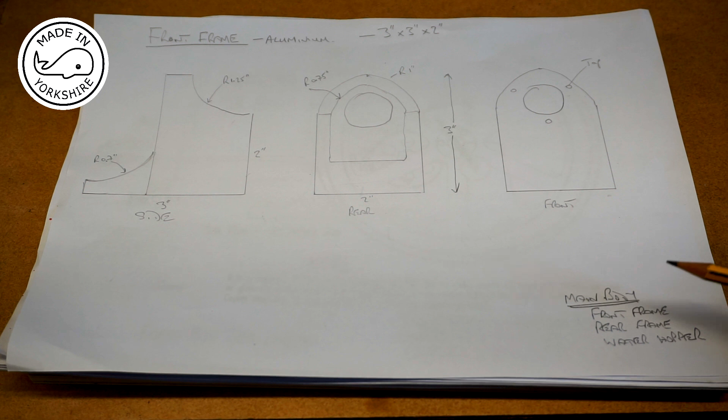Now in this video, I'm going to have a go at making the front frame for the hit and miss engine, the Farm Boy. And by the looks of the plan, it is quite complex, so let's see how we get on. Okay, so the main body of the Farm Boy is made up of three pieces, or three sections. There's the front frame, the rear frame and the water hopper.

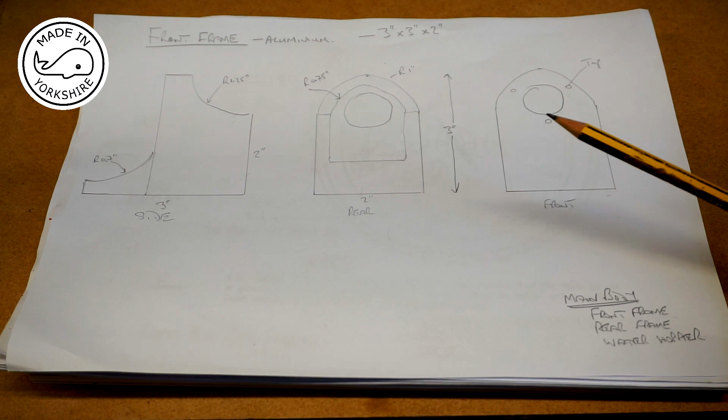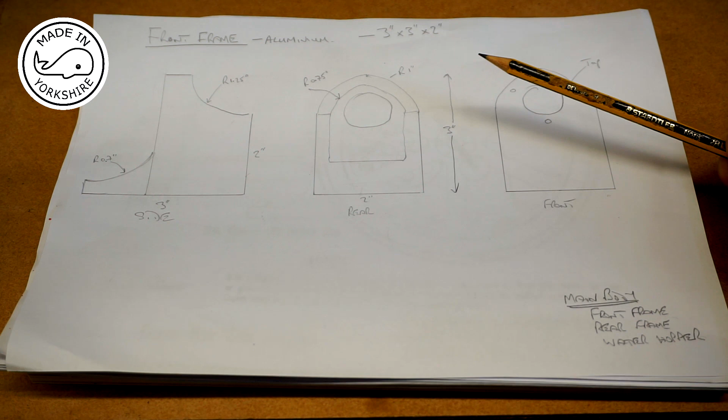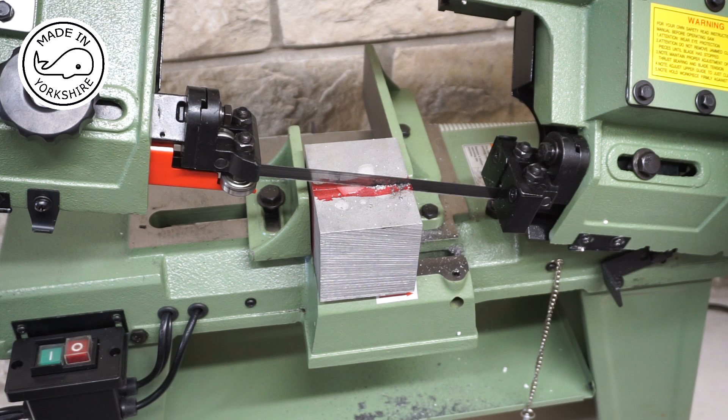And this is a rough sketch of the front frame. So just looking at the side, it's 3 inches long by 3 inches high. And looking at the rear, it's 2 inches wide. So I've got a piece of aluminium which is 3 inch by 3 inch by about 4 inch. So what I need to do first of all is to cut it to just over 2 inches in size. I'll do that on the bandsaw, and then I need to mill it to a decent finish, close to 3 inch by 3 inch by 2 inch.

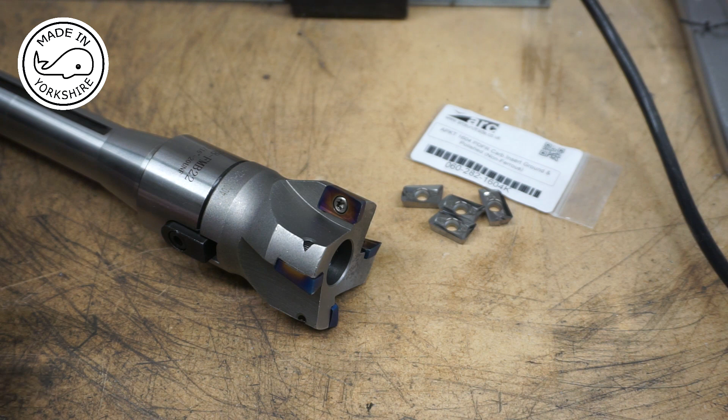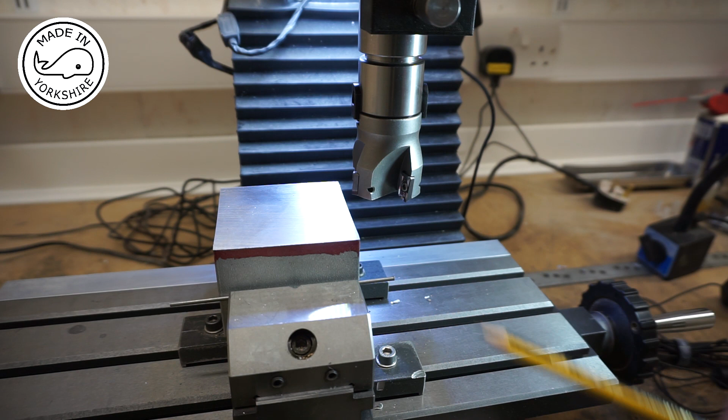That looks pretty good. Well, it's the first time I've used the bandsaw in anger, and I must say I'm pretty impressed with the result. The only minor criticism I would have is on this edge here. It's slightly concave. I don't know why that might be. But anyway, I'll put it on the mill, and what I need to do is to face all these sides off down to dimension. So to clean the faces up, I've got this 50mm face end mill cutter.

I've never used it before. I got it from Banggood a few months ago, and I'm going to swap out these inserts for some non-ferrous cutting inserts which I got from Arc.

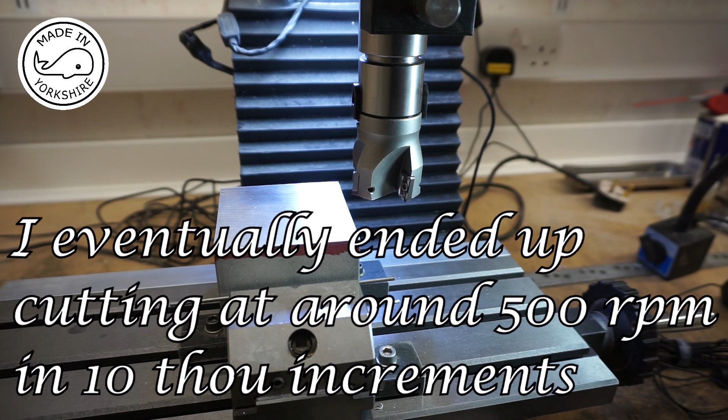Now a tip I picked up from Kevin, aka machineNZ. He's got some really good videos on his channel, and to manage to cut the faces so they're all nice and at 90 degrees is to put the rear face against the jaws of the vise and then use a thin rod at the front, tighten that up so that the back face is flush with the jaws. Then you machine this top end here, and then you rotate it 90 degrees and repeat, and you go right round until you've completed the process.

I never tried it before, so this will be the first time I've used this. It was the first time I used the bandsaw, so a lot of firsts in this video. So I think I'll be cutting around about 300 RPM, and I'm only going to take 5 thou off initially to see how we get on.

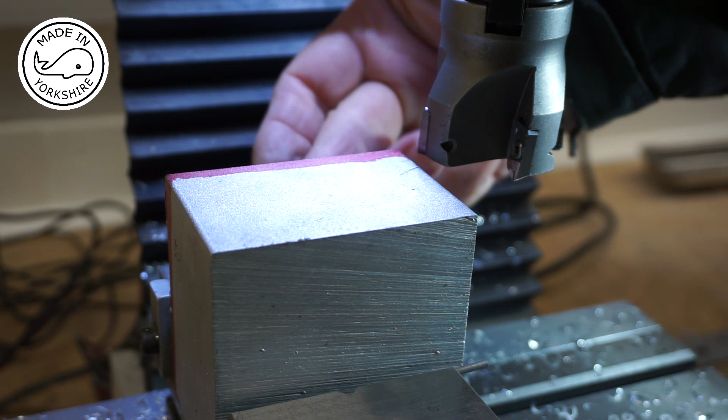Well, that looks like a really good finish. So what I'll do is I'll continue to mill this side down, and then I'll flick it over, mill that face, flick it over again, mill the other face, and flick it round again and mill the other face. Obviously my target dimensions here between these two faces is 2 inches, and between these faces is 3 inches.

Well, I just couldn't resist showing you this before flipping it over. I've got a really nice finish on that. I ended up taking a total of 20 thou off just to get it nice and level. So I've just flipped it round so the machined edge is now on these jaws. I've still got this rod in here, and I only want to take a few thou off this side just to get a nice finish. So as small amount as possible.

Well, it all seems to be going to plan, so I'll flip it round again, do the next side and then do the next side. I'll do all that off camera and then I'll get back to you. Obviously it's quite important to make sure that the vise is nice and clean when you're flipping it over, because you need the faces spot on. Now, one thing I forgot to mention was that before flipping it round you need to run a file across that edge here, because there'll be a little burr on it.

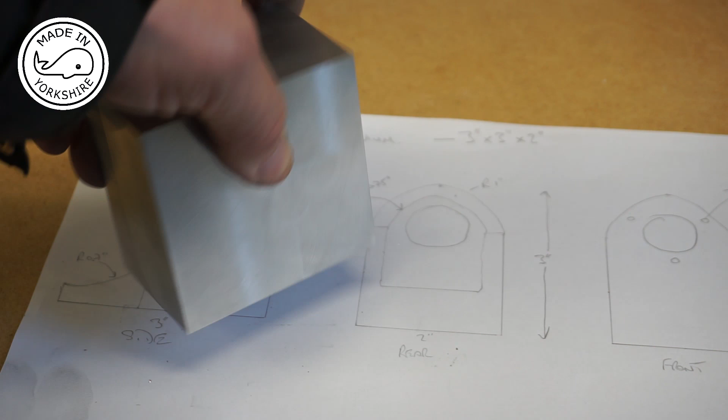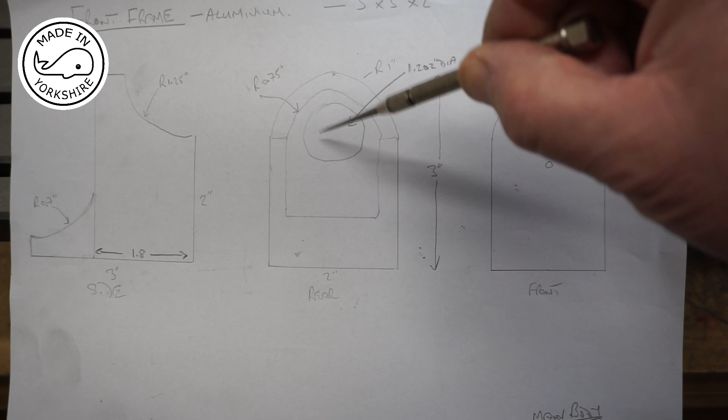But anyway, I've done all the four sides and then I've flicked it on its end, and it's pretty much at 90 degrees, so I'll mill this face now and then switch it round. Obviously I'll run a file across there, switch it round and do the other end, and hopefully it'll be all spot on. Well, I'm very happy with that, just a few thou out on each of the dimensions. So what I need to do now is to mark it up to start machining from the rear.

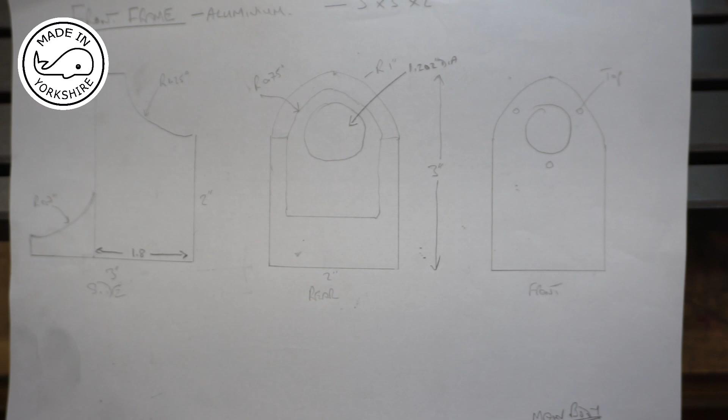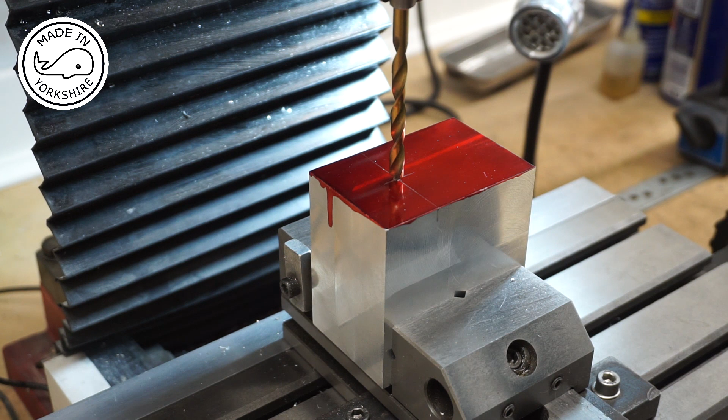So now I need to bore a hole 1.202 inches in diameter through from the end, the rear, and it's going to go that way, so I need it to go to a depth of at least 2 inches, because it needs to actually be 1.8 inches from the rear, and all this area will be cut out at some point in the future.

Okay, so I'll use a series of drills to open it out to a diameter of, let me see, 12 millimeters. So I'll go down 2 inches.

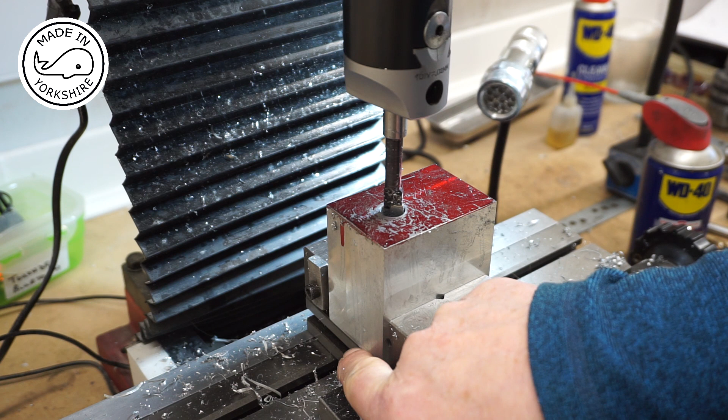Well, I opened it out to 12 millimeters and then I'm using this boring head to open it out even more, but it's really hard going. And I think the problem is, or one of the problems is, I'm drilling to a depth of 2 inches and there's nowhere for the chips to go. And in reality I'd be better off drilling from the other end, because I've got less further to go.

So I think what I'm going to do is I'm just going to switch it round and approach it from this bottom end. And the fact that I've got a hole there anyway is good, because then the chips can fall through it. So that's my plan.

I've switched it round and I've opened this other end up to 12 millimeters in diameter, and I'm starting to use this boring head now, and I'm opening it out about 10 thou at a time, and it all seems to be going pretty well at the moment. I've also set the depth stop on the Z-axis as well, so I can just plough down and I'm not having to look at the DRO all the time.

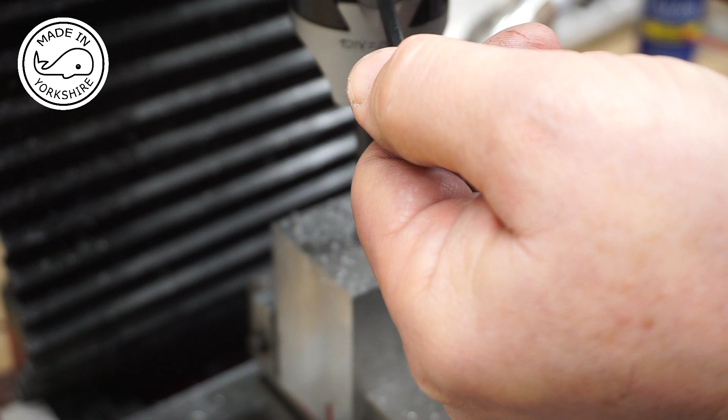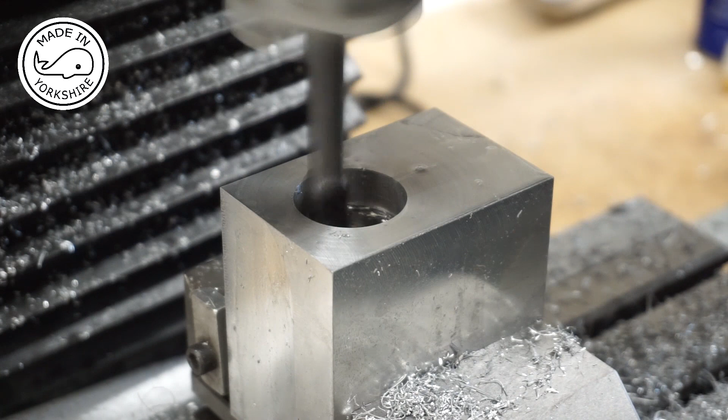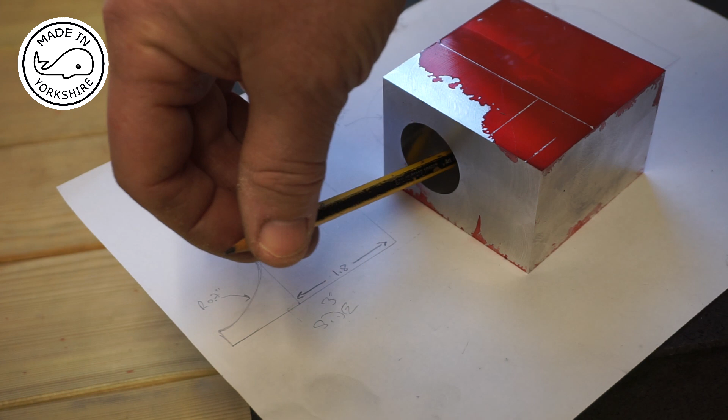So I'm going down to 1.7 inches, which should be good enough. So I'm doing about 10 thou at a time. Probably less actually, maybe 7. And this is the final cut on fine feed.

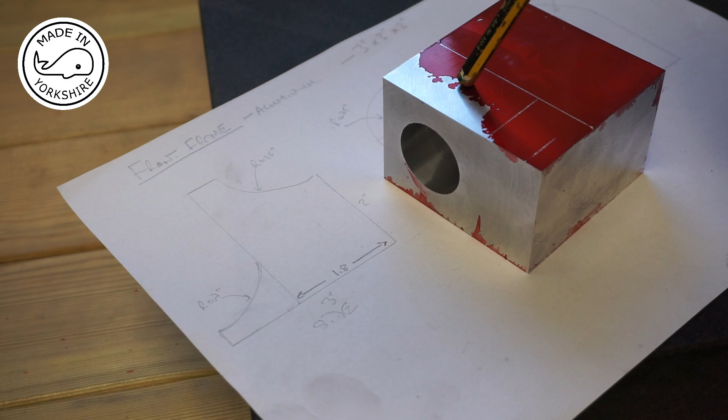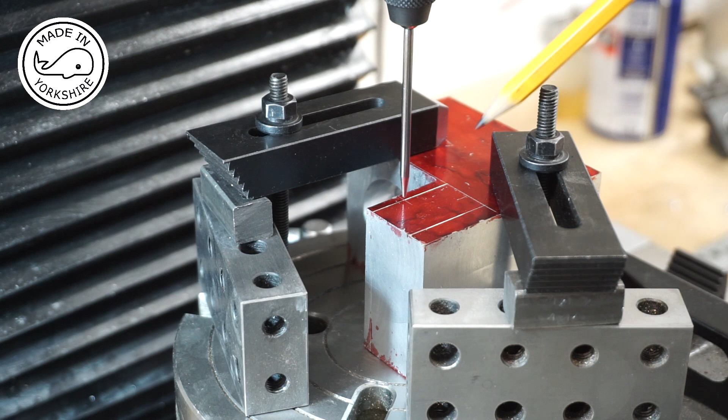Well, when I originally thought about this, my plan was to machine this section here and the back end of it. But having sort of machined this hole out here, which actually goes into this section here, I'm now thinking it'd be better to machine this here, because this is my reference surface as well. But ironically, what I'm going to end up doing now is cutting out most of the hole I've just made. But anyway, you live and learn.

So what my plan is, I'm going to put this on the bandsaw and cut this section out, but I'll do that off camera. So I've cut this section out using the bandsaw, I've centred the rotary table, then I've put the piece on the rotary table and I've centred it on this point here, which is 2.5 inches from this edge here and 0.985 inches from this edge here.

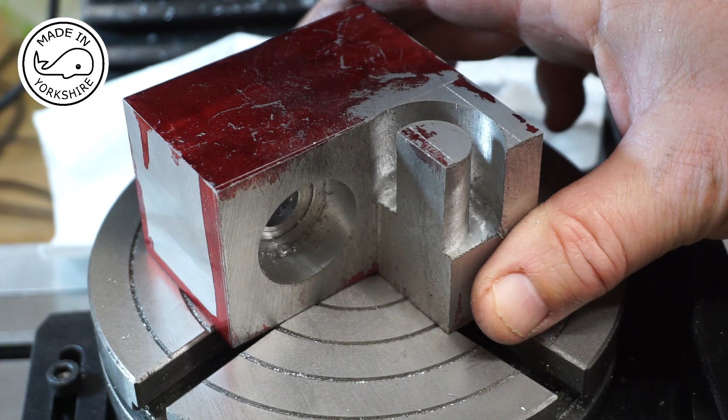So the idea now will be to cut a radius of 0.7 inches, which will just turn around here, hopefully. So I'm going to use an 8mm cutter. So 8mm divided by 2 is 4mm. So if you take 4mm off 0.7 of an inch, you get to 0.542. So if I move the y-axis by that amount, I should coincide with this line, and when I move the rotary table round I should coincide with this line. So let's see if we do.

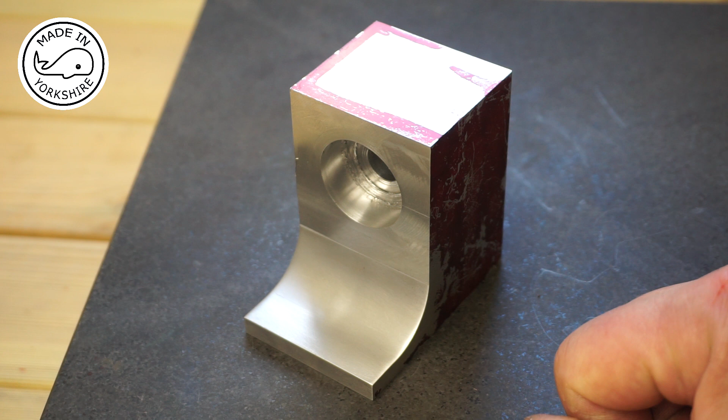Pretty good. Although you can't see it there, that looks good too. So I've made sure it's clamped down. So I'll start making cuts at 10th increments. Well, that looks good, so I'll carry on cutting. I'll do it off camera.

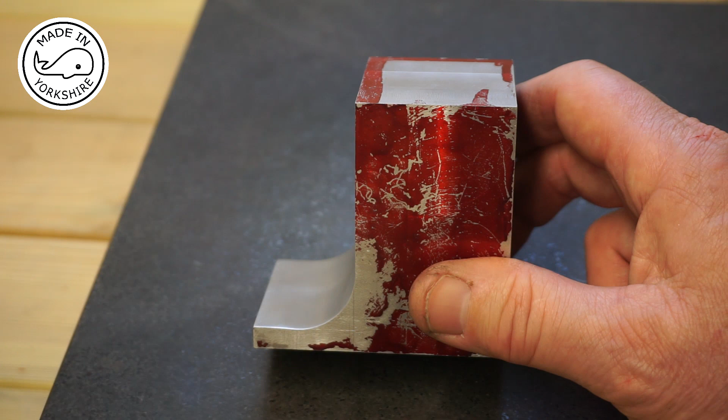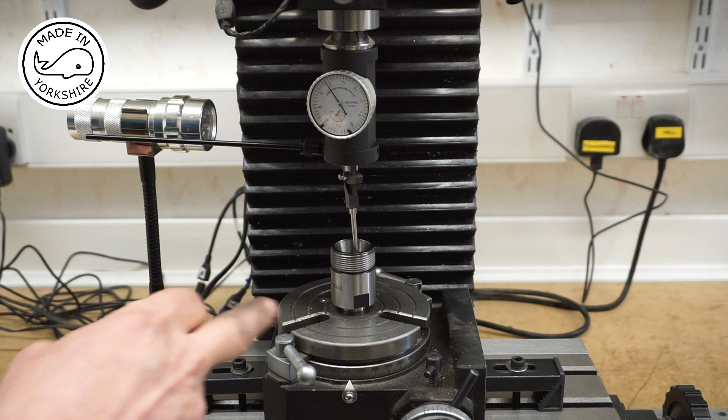Well, it all seems to be going to plan. I've just put this longer cutter on, and I'll continue cutting until I get down to about 1 inch in depth. Well, that looks pretty good. So what I'll do now is I'll just switch it round. I've moved the table back, so that's on centre. So I'll centre the piece on the mark I made, which is identical to the position of the other mark, and then I'll machine the rest of it. But I'll do all that off camera.

Well, it didn't turn out too bad. It's not perfect because there was a join mark down the middle, so I've had to use some wet and dry. Maybe I should have used a fly cutter or something like that, but I've not got a fly cutter and I don't know much about them. But it's now got me thinking about how I create the arc here. Maybe I need to get a fly cutter. So I need to do a bit of investigation, and I'll get back to you.

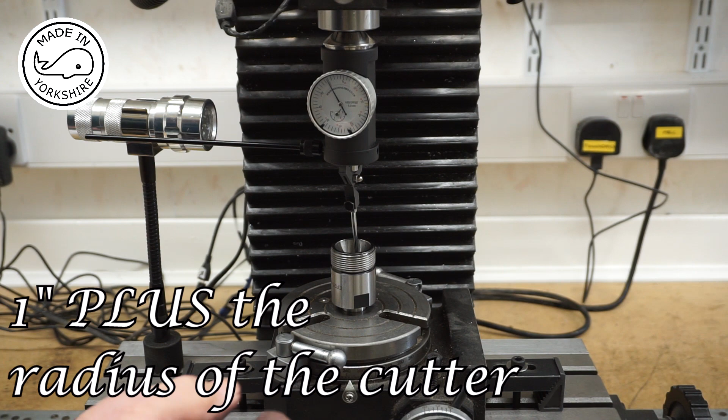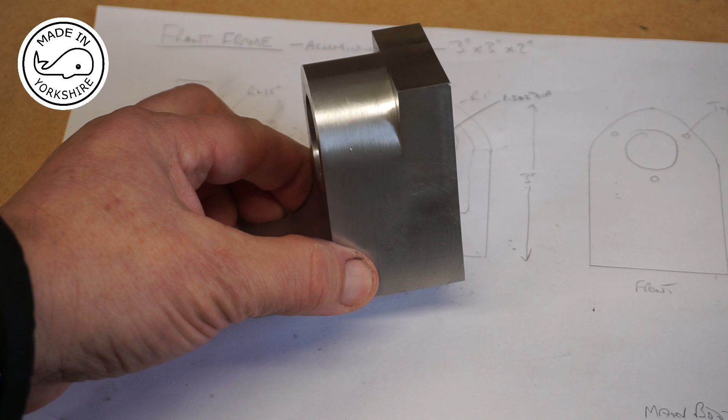Okay, so what I'm going to do now is to have a go at machining this radius on the outside edge here, and I'm going to try and do that on the rotary table. So the way I'm hoping to achieve this is I've centred the rotary table by putting this MT2 to ER25 collet holder in the centre, and I've used this coaxial indicator to get the centre. So that's pretty close.

So what I'm going to do now is I'm going to hold this in a collet, and I've machined this end here, put a thread on it, and that will actually go through the body of the front frame, and I can bolt it so it'll automatically get centred, and then I can move the table forward an inch plus the radius of the cutter and machine round that radius.

Well, I think that's turned out pretty well. Initially I only cut about ½ an inch down, and then I realised after I'd taken it off the mill that this radius here is going to expose some of this, so I've had to take another ½ inch off. But anyway, looking good so far.

So now to have a go at cutting this arc around here, and it's taken me about an hour to set this up. The table's centred, and the part needs to be positioned at a centre point which isn't actually on the part. So I've worked out what the offset should be and marked it on this piece of scrap down here. So that's actually resulted in the centre being pretty much 1.562 of an inch from this front face here, and 3.125 of an inch from the bottom here.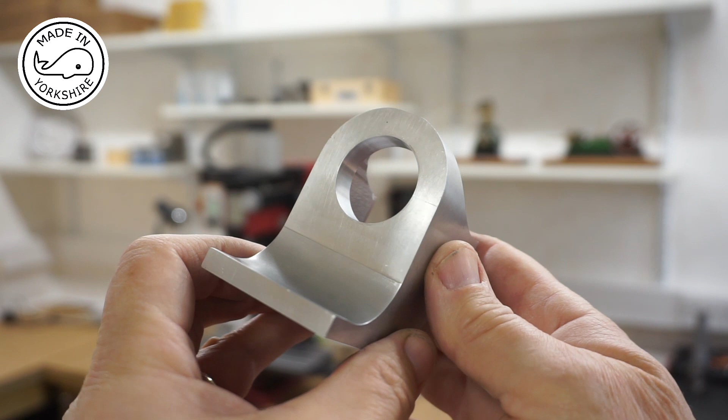Well, that was an interesting exercise, and it's definitely the first time I've tried making anything out of a lump of metal. I do find it sort of quite difficult at times envisaging what the 3D shape is going to be when I'm looking at two-dimensional drawings. So it's really interesting seeing it take shape. And this indexable face end mill, I think that's what you call them, first time I used that, and I was really impressed with the way that turned out.

But anyway, that's the end result. There's a little bit of extra work to be done, drilling and tapping, but I'm going to wait until I get to more of an assembly stage before I do that.